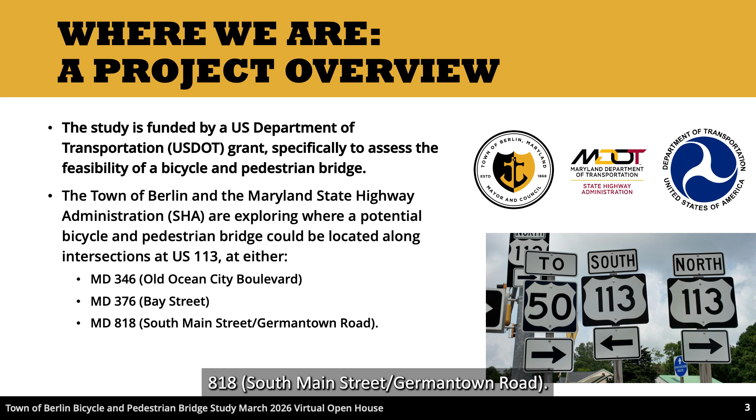This is a feasibility study for a future pedestrian and bicycle bridge, not a construction plan. The result of this study and the concepts drafted could be utilized as potential alignments and project alternatives if the town or state pursues the construction of a pedestrian bridge in the future. Any future construction would be subject to all federal, state, and other rules such as the National Environmental Policy Act.

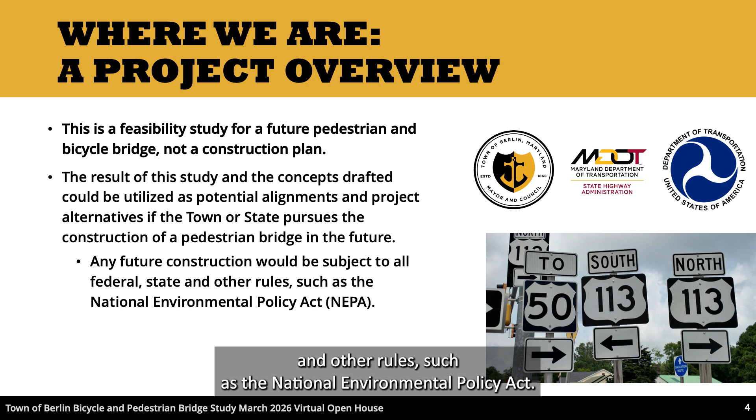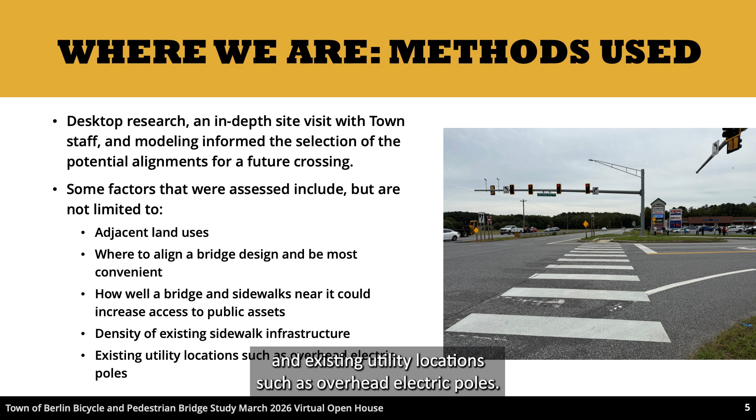Desktop research, an in-depth site visit with town staff, and modeling informed the selection of the most beneficial alignments for a future pedestrian and bicycle bridge crossing. Some factors that were assessed include adjacent land uses, where to place ramps to be most convenient to a hypothetical user, how well an alignment increases access to public assets, density of existing sidewalk infrastructure, and existing utility locations such as overhead electric poles. Some potential sidewalk connections to support access to a future bridge were also looked at.

In-person engagement as well as analysis revealed the need to improve sidewalk connections to the three study intersections. Potential options, such as a tunnel instead of a bridge, were ruled out due to local water table issues as well as being outside the scope of the grant. Participation in the study survey, information on how to participate is provided at the end of this presentation, will inform the town which pedestrian and bicycle bridge location would most benefit Berlin and the preferences of its residents.

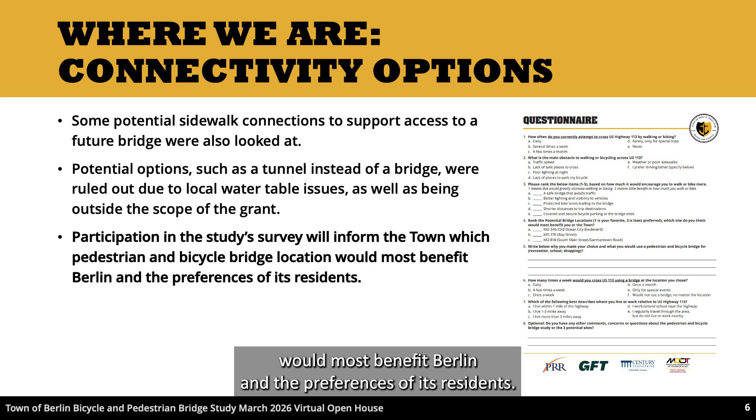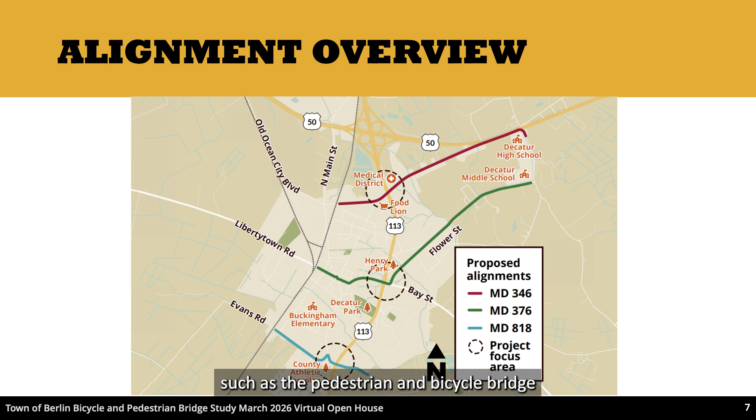This map shows the three pedestrian and bicycle bridge alignments that were studied: MD 346, Old Ocean City Boulevard, MD 376, Bay Street, and MD 818, Germantown Road and South Main Street. Per the grant which funded the project, the lines are shown to reach the abandoned rail line, which is a planned trail conversion project. The dashed circle focus areas are where potential improvements, such as the pedestrian and bicycle bridge and sidewalk improvements, would be located.

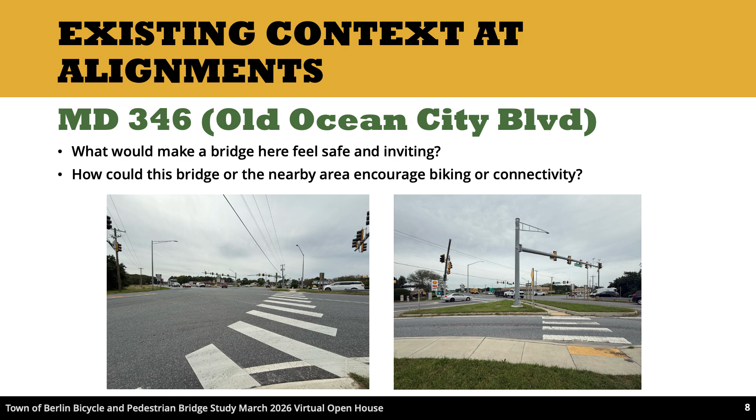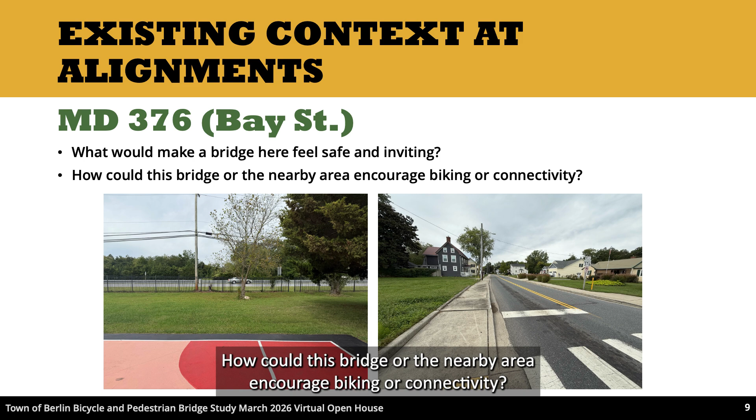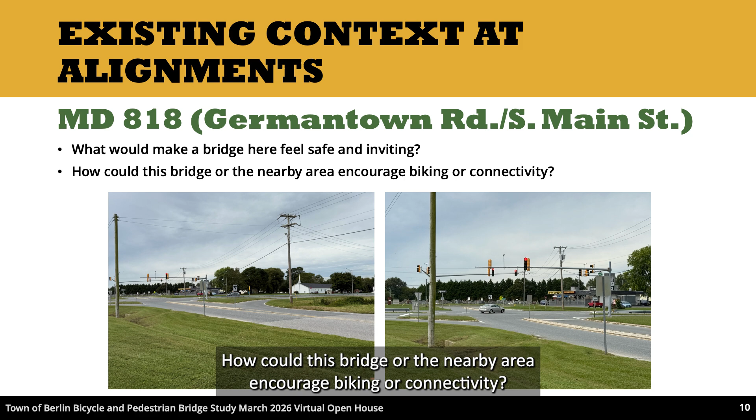What would make a bridge here at MD 346, Old Ocean City Boulevard, and US 113 feel safe and inviting? How could this bridge or the nearby area encourage biking or connectivity? What would make a bridge here at MD 376, Bay Street, and through Henry Park feel safe and inviting? How could this bridge or the nearby area encourage biking or connectivity? What would make a bridge here at MD 818 at Germantown Road and South Main Street feel safe and inviting? How could this bridge or the nearby area encourage biking or connectivity?

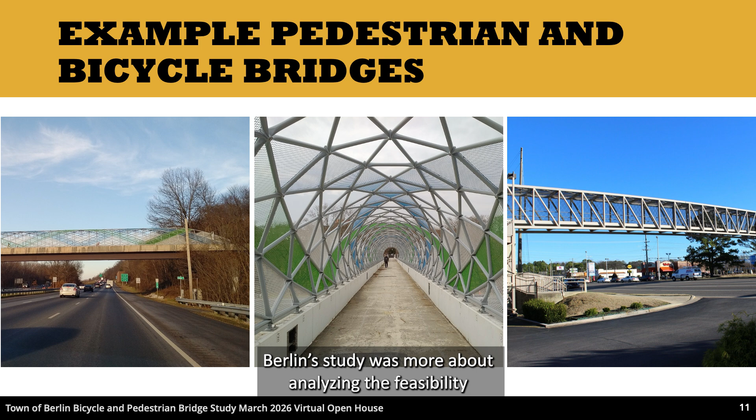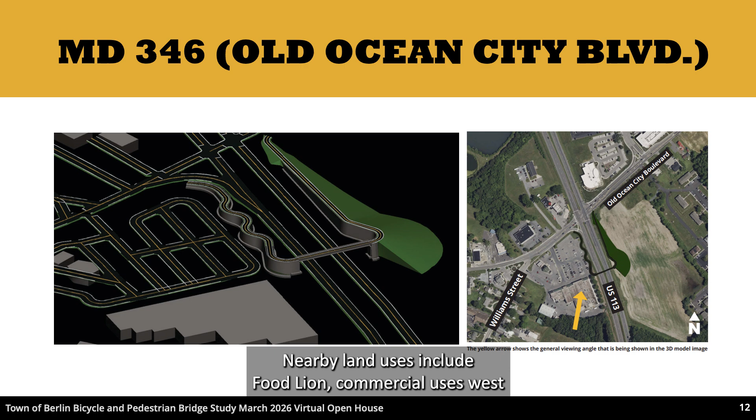Here are some examples of pedestrian and bicycle bridges from other areas of the United States. Berlin's study was more about analyzing the feasibility of a future bridge and less about design and aesthetics. The proposed pedestrian and bicycle bridge alignment at this location does have crosswalks to move across the intersection, but no crosswalk to cross from Food Lion East. There is no sidewalk infrastructure on the south side of Old Ocean City Boulevard, MD 346. Nearby land uses include Food Lion, commercial uses west of this intersection, and medical uses northeast of the intersection.

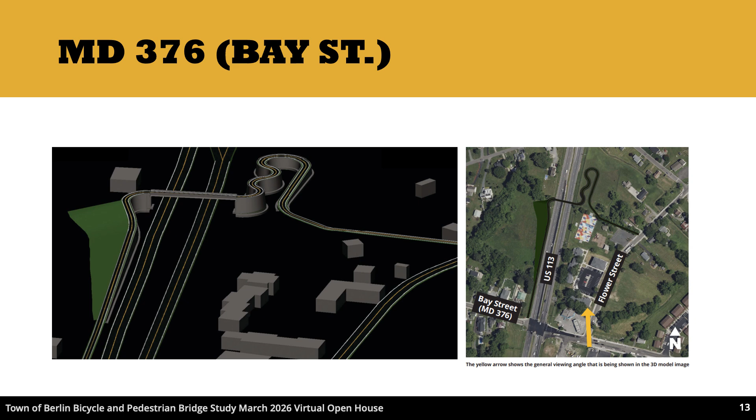The proposed pedestrian and bicycle bridge alignment at this location does have crosswalks to move across the intersection, but no crosswalk at the south leg of the intersection. This studied bridge location would go north from the Bay Street and US 113 intersection and cut through Henry Park to Flower Street. Nearby land uses include Henry Park, residential uses, and commercial uses such as Dollar General. The proposed pedestrian and bicycle bridge alignment at this location does not currently have any crosswalks to cross the intersection. Nearby uses include Rody Joe's, county sports fields, and churches west and east of the intersection.

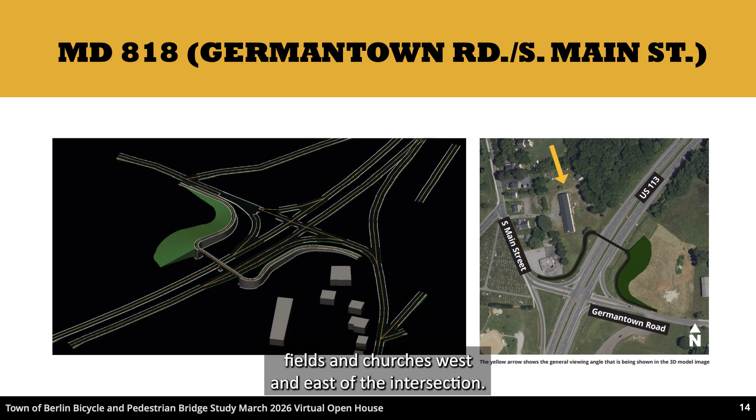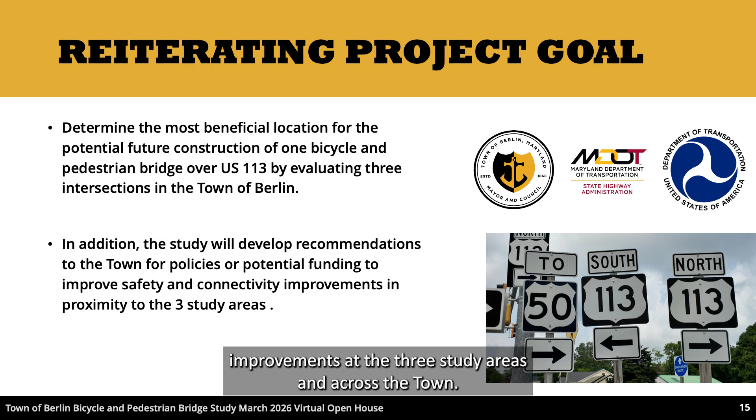The project goal is to determine the most beneficial location for the potential future construction of one bicycle and pedestrian bridge over US 113 by evaluating three intersections in the town of Berlin. In addition, the study will develop recommendations to the town for policies or potential funding to improve safety and connectivity improvements at the three study areas and across the town.

Thank you for viewing our virtual open house. The study's 8-question survey can be found on the Town of Berlin's website at berlinmd.gov/reconnecting-communities-and-neighborhoods and is open until Friday, March 27, 2026. This is the same survey as the one given to participants of the in-person engagement workshops. It takes approximately 5 minutes to complete and is anonymous. We appreciate your feedback.